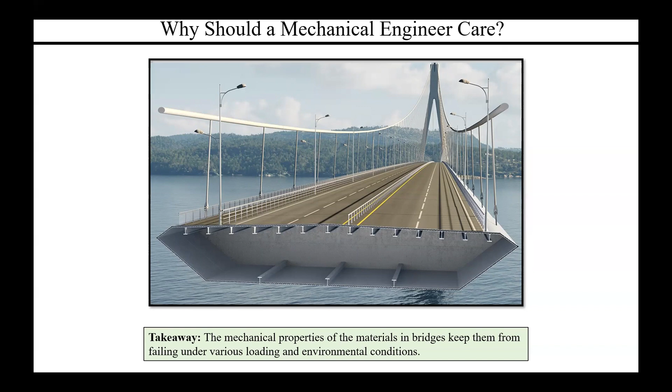So again, why should a mechanical engineer care? You're talking about extremely large application spaces where you'd be interested in something like the mechanical properties. For this lecture, we're really going to focus on mechanical deformation and how that affects the properties of the material, and discuss what deformation actually means in the context of the structure side of the material.

The main theme of this lecture is that we have two regions when you deform a material via some sort of mechanical force. The first is the elastic region, and the second is the plastic region. From this stress-strain relationship we're looking at here, the region to the left, this linear region, is your elastic region. And pretty much everything else, once it enters that nonlinear region, is the plastic zone.

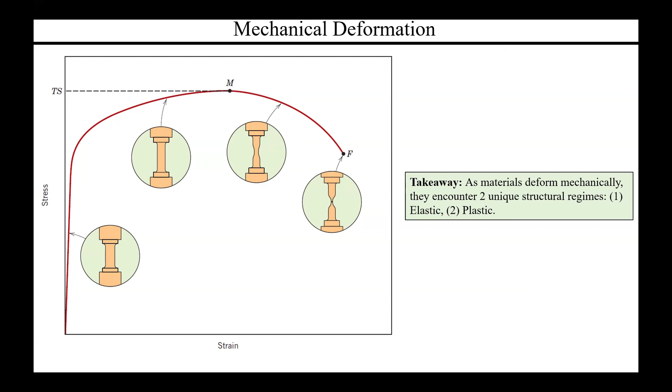As we move along this stress strain curve, we can even see these inserted images that show snapshots in time, and you can see there is a structural change that occurs. We will talk about those changes throughout this lecture. But again, to reinforce this idea: the linear region is your elastic region, and the nonlinear region is your plastic region.

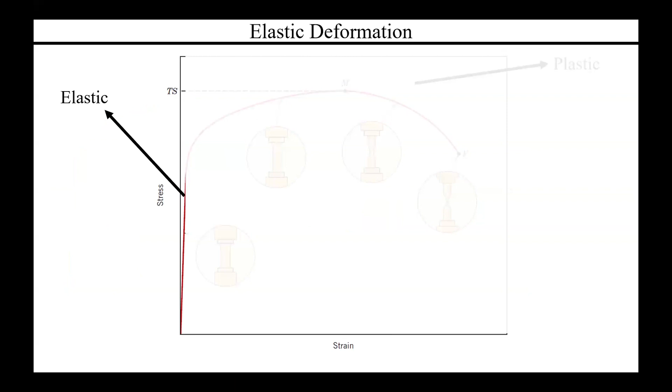So we're going to start the first half of this lecture focused on the elastic region.

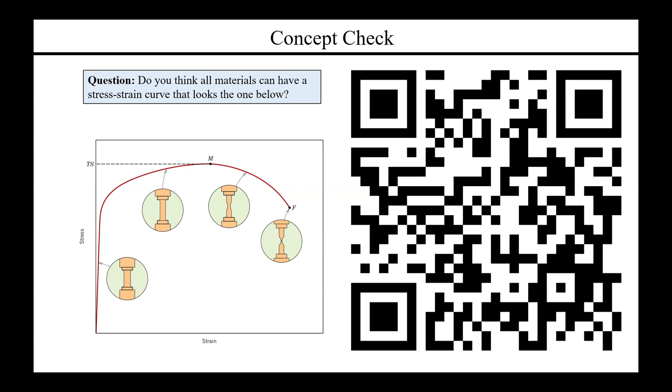So the question here is, do you think all materials can have a stress strain curve that looks like the one below? And what I mean by the one below specifically is that there is a unique elastic and plastic region. The answer is, it kind of depends. I know it's not a great answer, but as with most things in material science, it really does depend very heavily on the actual specific conditions that we're talking about.

So, for example, these stress strain curves are kind of snapshots based on the external conditions. What temperature was it at? How humid was it? Anything like that. What pressure was it under? And the stress strain behavior can ultimately change depending on what those conditions are, and we'll talk about those.

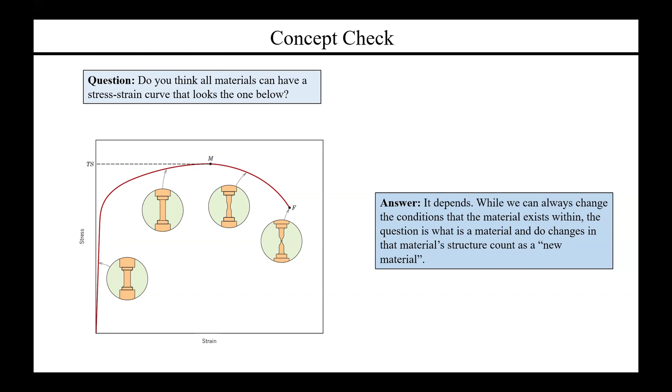Another aspect of this is, what really counts as a new material? If the material is corroded beyond belief, is it really the same material anymore, or is it maybe some oxidized version of what you started with? So, is it possible to create a stress strain scenario that looks like this for pretty much all materials? Pretty close. But again, you have to change the conditions that it exists within.

When we're talking about different types of mechanical loading, this is the type of force that you can apply onto the material. The two simplest are compressive and tensile. Compressive is applying a force and making it smaller somehow, and tensile is the opposite, making it larger. So physically, you're crushing something to make it smaller, or pulling it apart, and that's your tensile force.

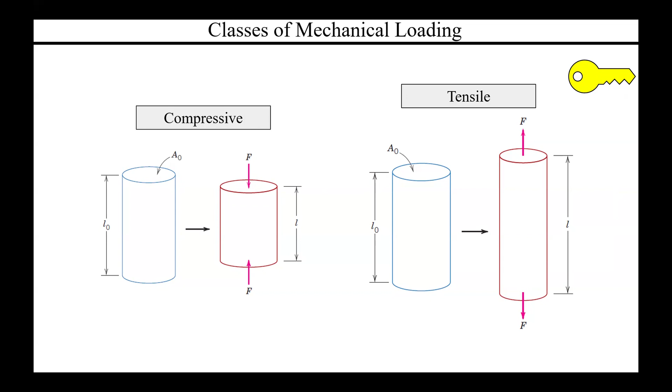Two more complex, but still relatively simple, types are shear and torsional. For shear, you apply a force onto the material, and instead of just pulling it along one direction, you're changing multiple directions at once. I equate this to taking a box and turning it into a diamond shape - the volume doesn't really change, but the shape does. Torsional is applying a rotational force onto the system, so you're getting a rotational structure change.

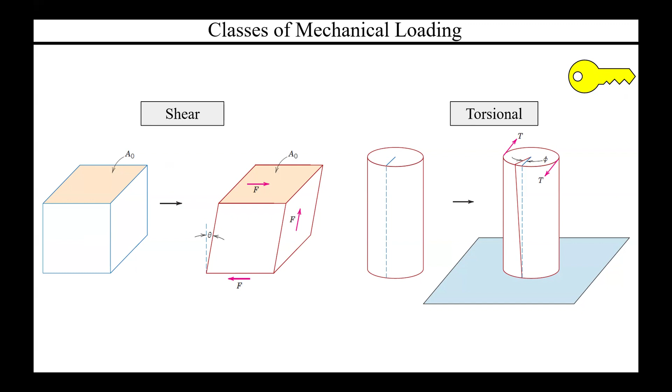In order to understand all this, we also have to understand what the concept of stress even is, in particular engineering stress. We'll talk about different types of stress throughout this lecture, but think of it this way: you're applying a force over some area. It's similar to the definition of pressure, but stress is a more universal force per area, whereas pressure is specific to certain instances.

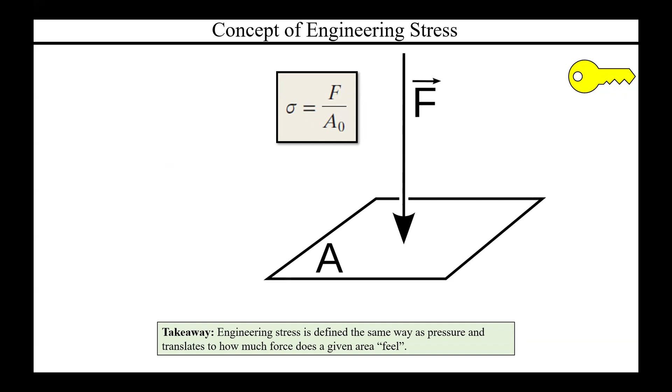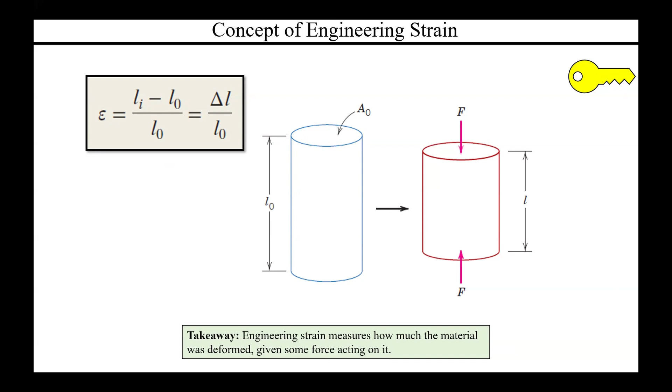That force will ultimately cause the material to change, and this is where strain comes from. Strain, at least in the context of tensile or compressive, is fairly straightforward - you apply a force, the material changes along one direction, so you measure the strain as the change along that direction, your current length versus the initial conditions. Because of that, you end up with negative and positive strain. In compressive, negative strain implies the material got smaller, and in tensile, positive implies it got bigger.

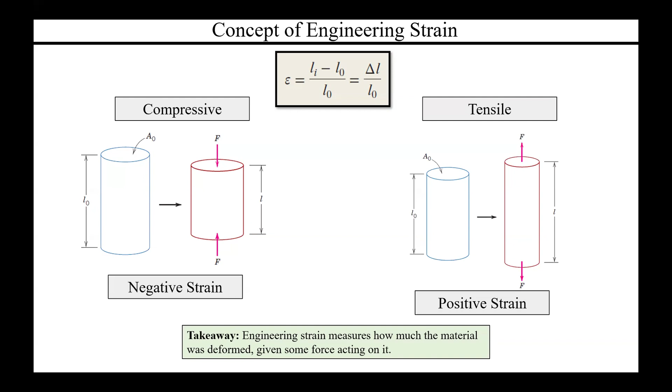That is purely due to convention. You could flip your L naught and Li and redefine this somehow, but the standard convention is that negative strain means it got smaller and positive strain means it got larger.

Now shear stress or shear strain is a little bit different, in part because the material is changing shape along two directions. So you don't have the same simplistic length-based change as in compressive and tensile. Here you define the strain as a function of the angle that the material underwent in that change of shape - the tangent of that angle is how you define the strain.

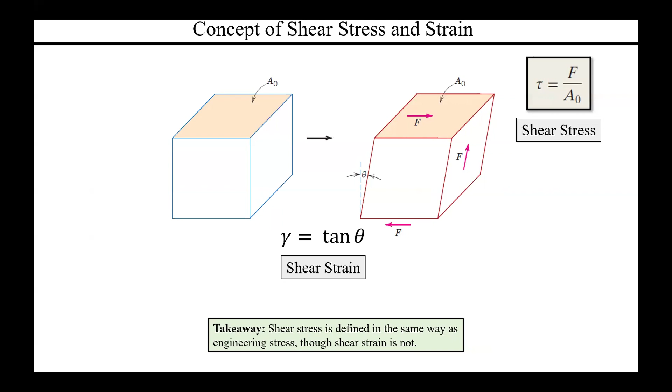The stress is going to be defined in pretty much the same way - it's still a force being applied over an area. It's just leading to a different physical change within the material.

The definitions you just saw are really defined for the case where the stress or force being applied is acting either parallel or perpendicular to the actual planar faces of the material, those outside faces. If you want to do this for an arbitrary geometry, the definitions are defined with regard to the angles that the stress is actually being applied at.

Now this is relevant, and why is it necessary? You may, for example, apply a force diagonally onto a material - it's not perpendicular to the material. So how that force actually gets distributed within the system may change. If you're applying it along one of those planar faces, all of that force is being distributed evenly into the material because it's perpendicular or parallel to it. But in the case of a force applied at some non-zero or not 90-degree angle onto that material, the force will get distributed throughout the material in different ways.

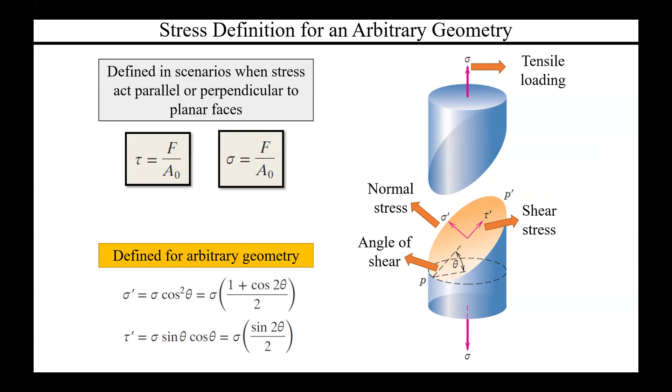Maybe it's partially distributed - maybe I applied a force and 80% of it went to the tensile force and 20% of it went to a shear force. And again, that depends entirely on the material, what its structure is, and the actual angle that you applied that force at.

One important aspect of these stresses and strains we're talking about is the ability to quantify that relationship, the stress strain relationship. This is done in a couple of ways, but it's almost always done through the idea of a modulus. In reality, the modulus is just a slope, but it's a slope under different scenarios.

The elastic modulus, you may also hear this as tensile modulus or Young's modulus. It's all the same thing. This is really the slope of your stress strain curve when you're doing tensile or compressive deformation.

Similarly, shear modulus measures deformation of shape, specifically at constant volume. We talked about this earlier. And then finally, bulk modulus measures volume deformation.

Again, that's the stress strain relationship under volume deformation, specifically isotropic volume deformation, meaning all of the material is changing its volume at the same rate. This is essentially the equivalent of a box getting bigger, but it remains a box, so all those axes relationships are the same.

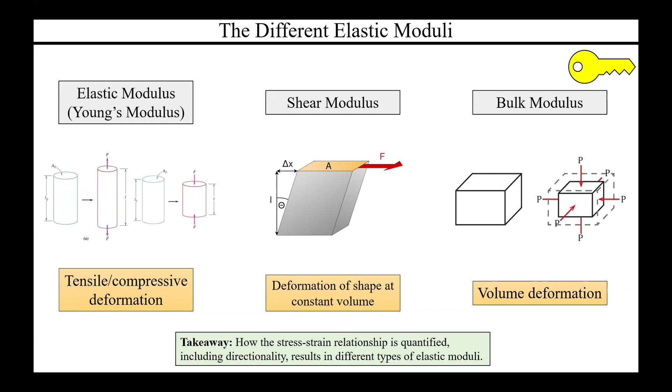If one side of the material is changing its volume deformation faster than the other, then in reality you don't have one bulk modulus for the entire material. You'd have to break the material into segments, each with its own bulk modulus. This is because the material changing in different ways depending on location means there are different structures within it, so you need a bulk modulus for each structure you're looking at.

Let's talk about this first for the scenario where we have tensile compressive deformation. This is what the relationship looks like. If you remember back to the beginning, we talked about how the elastic region was that linear region, so our relationship is really just y equals mx plus b, which is what you see here. Your y is your stress, your m is your modulus, and your x is your strain.

There is no b because the y-intercept is 0, so it's 0 stress at 0 strain. But that's really what this is—it comes from just a simple y equals mx plus b.

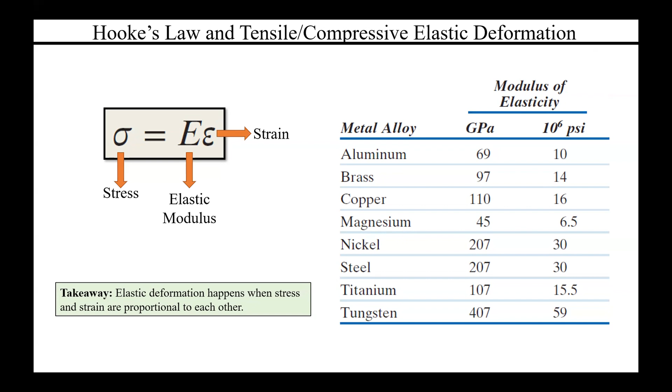But if you look at something like brass versus tungsten, you'll quickly find that tungsten has a nearly 4 times larger modulus of elasticity. What this means, in principle, is that you need to supply 4 times the amount of force on tungsten compared to brass in order to induce the same strain.

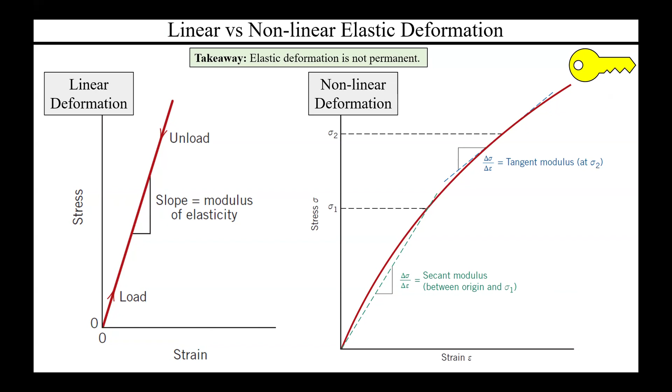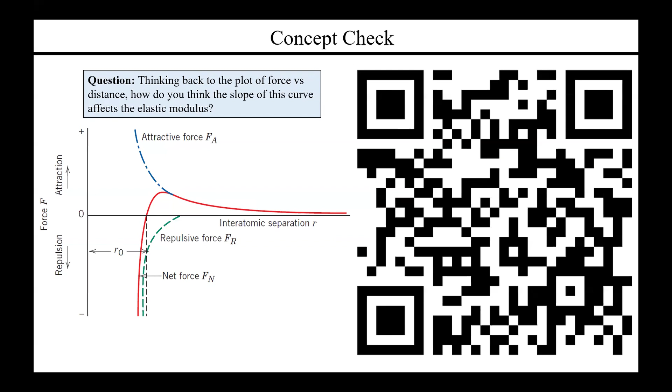So another question: thinking back to the plot of force versus distance, how do you think the slope of this curve affects the elastic modulus? Feel free to answer the QR code if you're interested. But the answer is that a larger slope equals a larger change in force equals a stiffer material.

That's really the portion on the left of this red line where you cross that 0 point and then dive down into the negative region. Essentially, if you're pushing atoms closer and closer, a larger slope means more energy is needed to push those atoms closer together, which means you need to apply a larger force to facilitate that. That ultimately leads you to a stiffer material.

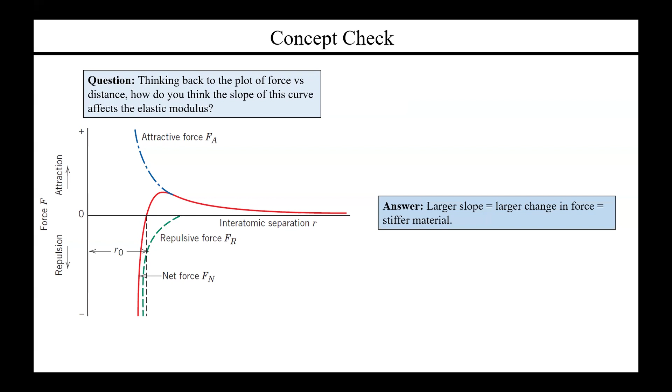Interestingly, if you look at this, it's a similar plot to what we showed back in our bonding lecture, but the elastic modulus is essentially proportional to the slope of the force, prior to that equilibrium bond length. You don't want to go past the zero point, because the atoms are just getting further and further apart, so they're not really interacting anymore.

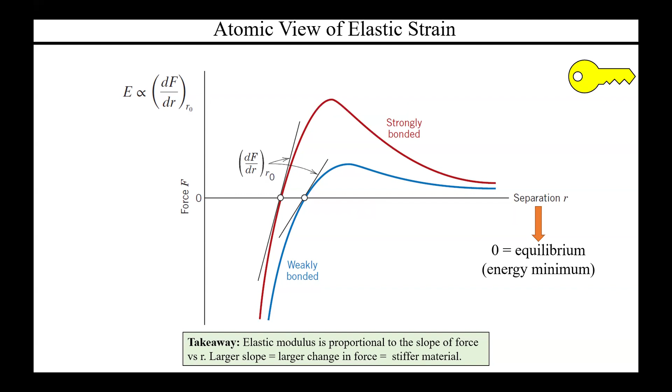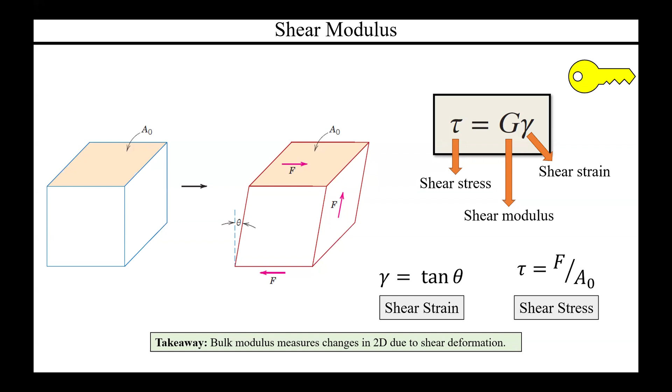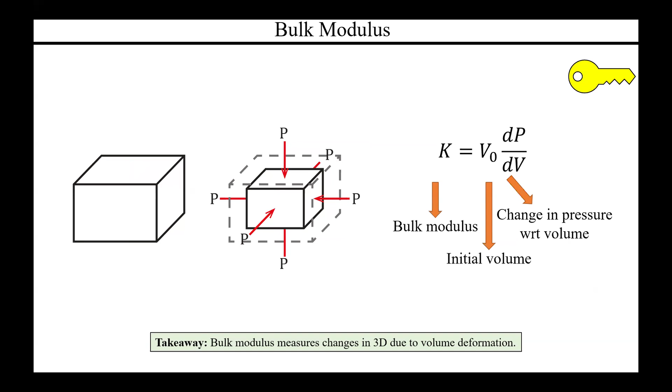Bulk modulus is slightly different. Here it's more about the product between the initial volume and the change in pressure with respect to volume. That gives you a sense, kind of that ratio between the two. You can also arrive at bulk modulus by measuring energy as a function of volume, and essentially the bulk modulus would be the slope at that energy minimum. So that's another way to access bulk modulus.

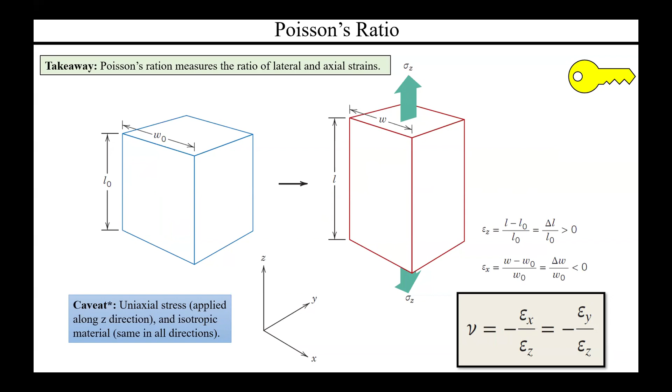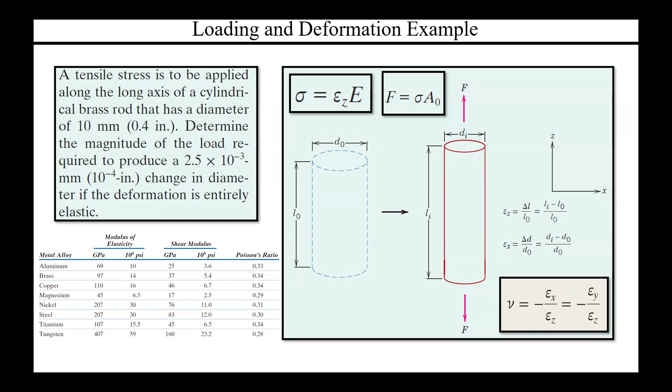The first step is to recognize that ultimately what you want is the strain in Z, since this is a tensile force being applied onto the material along that direction, and you don't have that. What you do have is a change in X, which is your cross-section diameter difference. So you can solve for that and then use Poisson's ratio, since you know it for brass, to solve for the strain in the Z direction.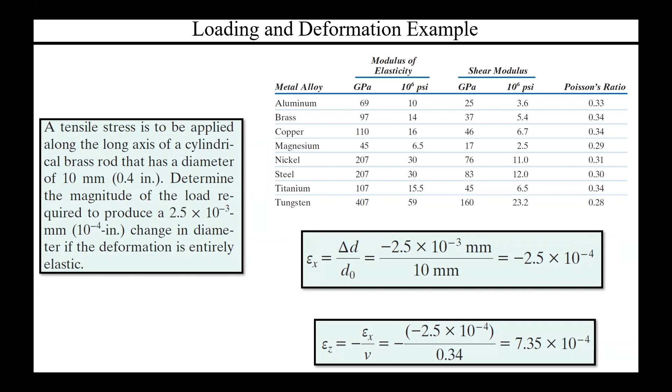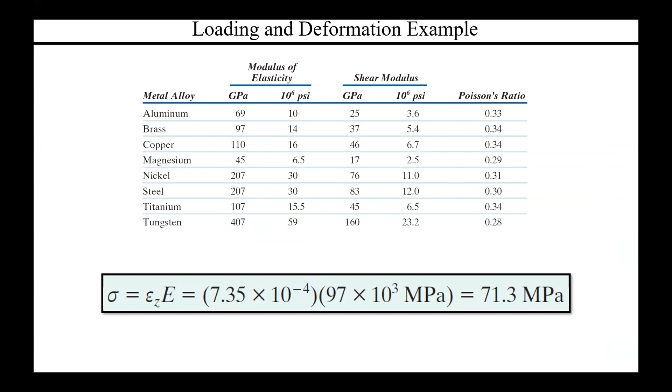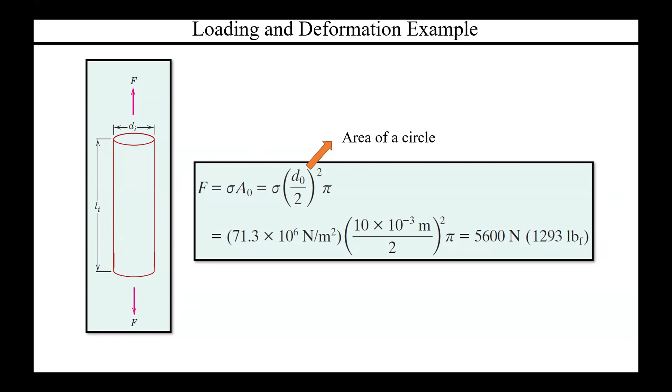You can then solve for the stress within that Z direction, along the tensile direction, by using the elastic modulus coupled to the strain in Z, giving you your stress. But ultimately what we wanted was the magnitude of the load, not the stress itself, so that would be force. You need to understand that this is a circular area, and because that force is being applied perpendicular to that plane, that's where the force actually comes from. So your area in this case is the area of a circle, and you plug your values in to get your final solution.

Another important aspect of this is that elastic properties, mechanical properties in general, are not constant. They depend on many things. Temperature is an easy one to visualize - you heat it up and obviously it's changing its structure.

So in this case, tungsten drops a little bit from negative 200 to 800 C. Aluminum sees an even larger drop. Part of the reason for that is that 800 C is not really close to the melting temperature of tungsten, whereas with aluminum, it's beyond it. So you may see a larger drop off at lower temperatures for materials as you're approaching the actual melting temperature, whereas for materials not even halfway to the melting temperature, you won't see as much degradation. This is important because it means you'll see larger degradation the closer you get to something like melting temperature.

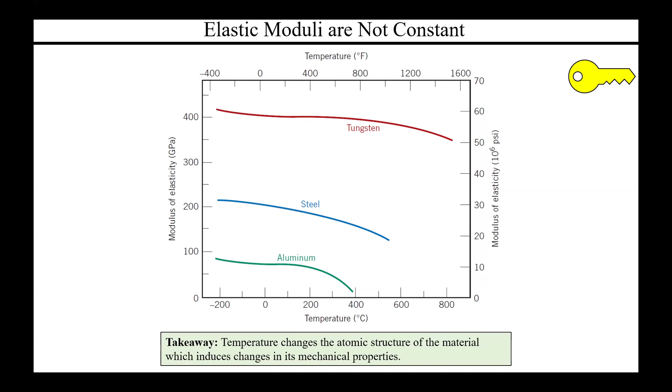Another important aspect we haven't talked about yet is time dependence. Everything we've discussed up to this point is this ideal elastic scenario: you apply a stress, there's a static change in strain that isn't really changing, and when you remove the stress, the strain goes back to zero if it's purely elastic. The reality is this is not necessarily true - there's usually an actual time dependence aspect.

This would be your linear viscoelastic and anelastic behavior. We'll talk about other types of time-dependent behavior, particularly when we get to things like polymers. But if you look at the anelastic case, this is a small effect.

Think of the y-axis as the initial stress applied onto the material. That stress is constant, but the strain changes as a function of time. In the anelastic case, you apply that stress and get a small change in strain over time, but eventually it plateaus. When you remove the stress, it takes a little time to restore the strain that was induced - it's not an immediate jump back down to no strain.

The viscoelastic case shows a much larger and even constant change in strain when stress is applied, and it never really plateaus. When you remove that stress, it's similar to the anelastic case - it takes time before it eventually plateaus off. But the important part is that in the viscoelastic case, you didn't recover everything. You can think of this as a form of plastic deformation, but we'll talk more specifically about what viscoelastic means structurally in polymers.

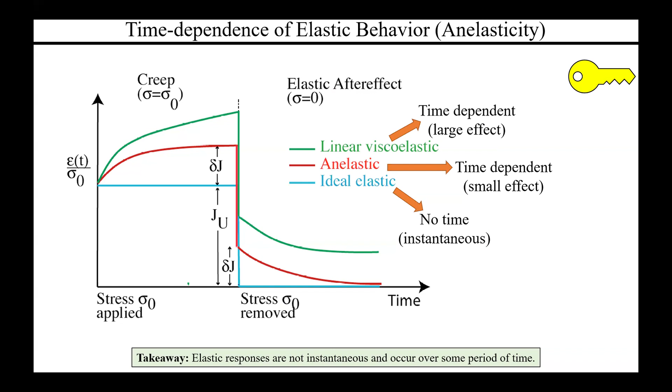Now let's move into the plastic region, which can be broken up into a few different zones. The first is when you've left your elastic region and are pushing toward the M point, or tensile strength - we'll talk about that later. That is where you see uniform deformation within the material.

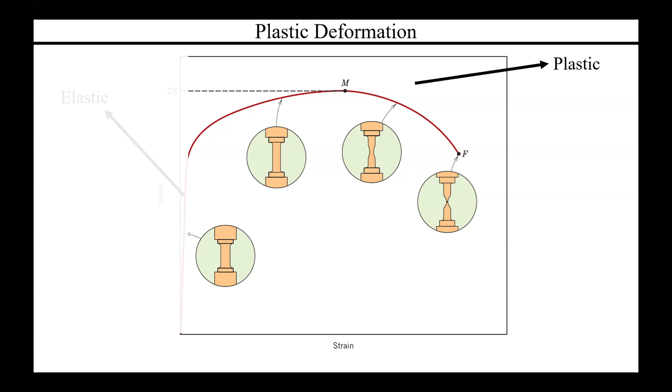Past that point, you're getting localized deformation, which is why you see this hourglass shape start forming in the pictures. That means the stress is concentrating within specific points. What you're seeing is a phenomenon called necking, where the stress is highly localized to a specific region, and that is where the material will ultimately fail - the point F, or fracture point.

At the beginning of the plastic region, the material is actually getting stronger. Once you've reached the maximum stress you can handle, the strength decreases, in part due to this localized deformation making the material weaker.

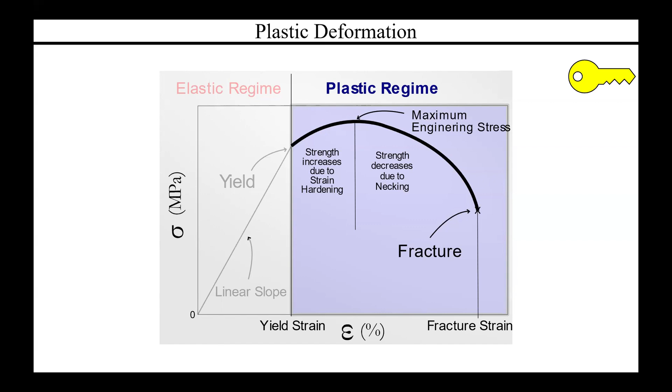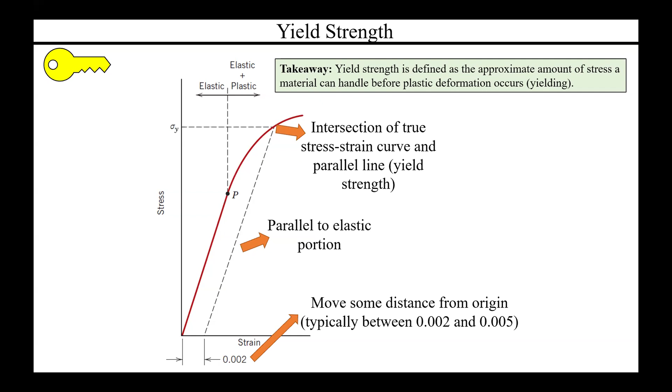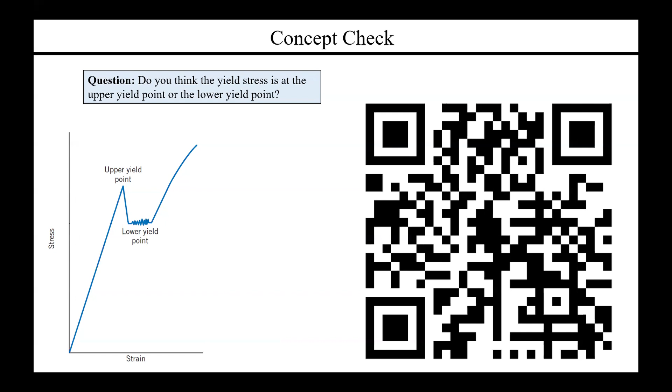An interesting concept check: what happens when you're increasing in the linear region, hit an upper yield point, then a quick drop-off to a lower yield point, with some oscillatory behavior before picking up again and entering a nonlinear region? Given that complicated yielding behavior, what do you think the yield stress actually is - the upper yield point or the lower yield point? The answer is surprisingly the lower yield point.

The reason is, if you think back to what yield strength is, it's the point at which there is no longer elastic behavior - it's the transition between elastic and plastic.

And there is no requirement that that transition point happen at the maximum stress that can be met prior to plastic. This is an interesting caveat in that you can have scenarios where you can sustain a fairly large stress, but then something happens in the structure of the material and you see a drastic drop off in the stress that can be handled. It's only after that drop off that you actually see permanent damage to the material. We'll talk more about this when we get into failure and strengthening of materials, but it's an interesting phenomenon here.

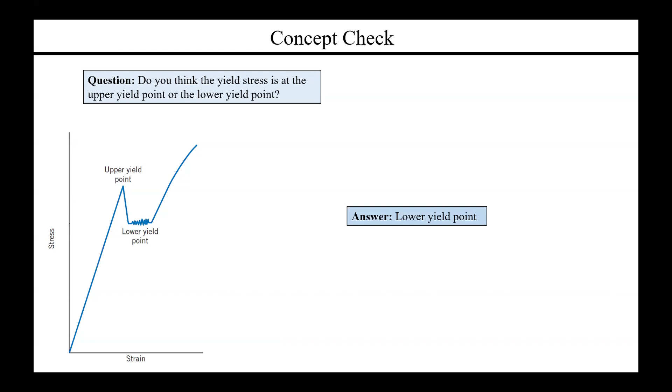It's important to remember that what yield stress is actually measuring is that transition period between the elastic and plastic region specifically. So this is kind of a recap of what I just said. A key piece of information is that parallel offset line we talked about to estimate the yield strength. You can't really use it here because there's not a continuous stress strain behavior. There's a discontinuous behavior at that upper yield, lower yield transition region.

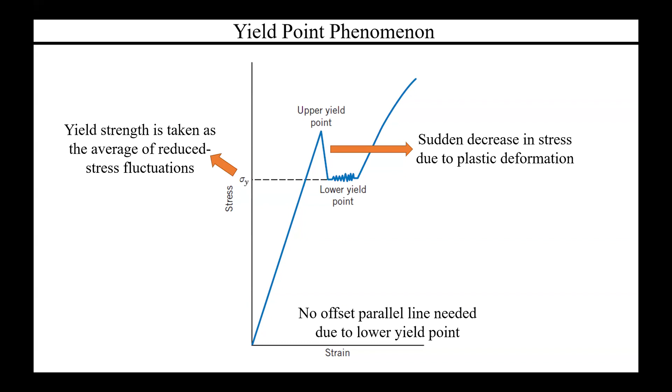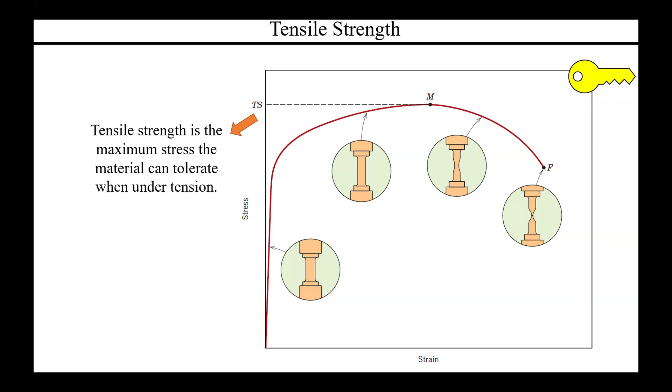So the tensile strength represents our transition between uniform deformation and concentrated or localized deformation. Prior to the tensile strength, you're getting uniform, homogeneous stress applied throughout the material, which is making it stronger. We'll talk later on in strengthening about what the actual mechanisms behind that are. But once you reach that M point and transition beyond it, you're getting localized stresses. So the stresses are building up in certain spots, getting this necking behavior, at least in a ductile material, until eventually you hit that fracture point.

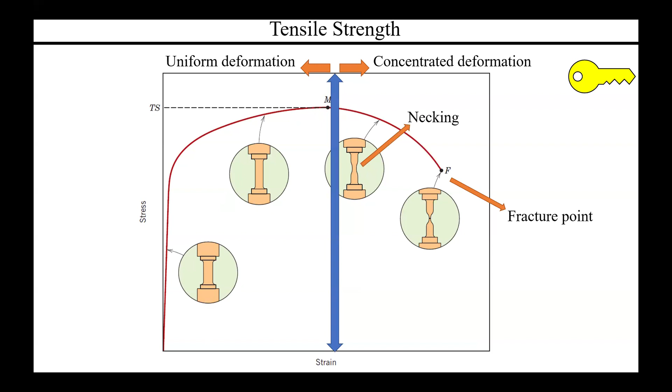So we're going to do another example here. There are two questions that you need to solve. The first is the modulus of elasticity, so given all this information, figure out what the tensile modulus is. The second is the maximum load that this cylindrical rod can sustain if you have an initial diameter of 12.8. There's a couple of little subsets here. Note that the 150 MPa, 0.0016 point is pointing to a point within the linear region of the subplot, and the subplot is just a zoomed in region of the very beginning of the much larger plot. Again, that A point there, A 345, 0.06, is literally pointing to the A on the plot.

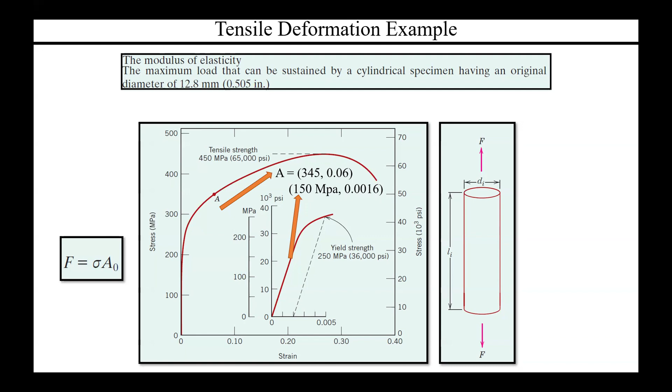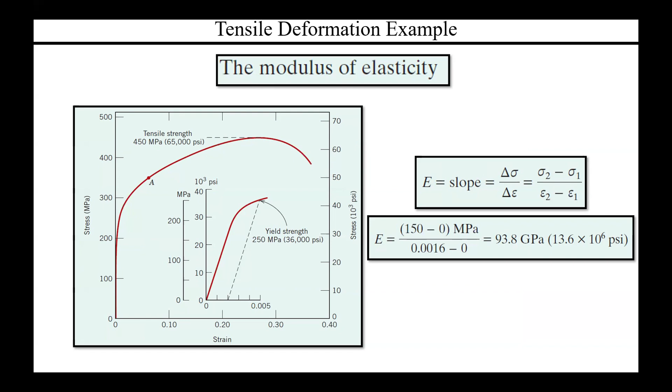So modulus of elasticity: we know that that's the slope within the linear region. So you can literally just pick that point that I had added onto the diagram, that 150 and then 0.0016. And again, the second point can always be the origin because it's the slope, it's a linear region. So you can pick the origin always and then use those 2 points to get your elastic modulus.

So once you have that, another important aspect of this is we want the force, so that's the second question here. The original diameter is 12.8 millimeters. So again, the key here is understanding that what we're really looking for is this idea of a maximum load. So that's your tensile strength. That is why the stress that you can actually plug in here is that 450 times 10 to the 6 newtons per meter squared, which is your 450 megapascals.

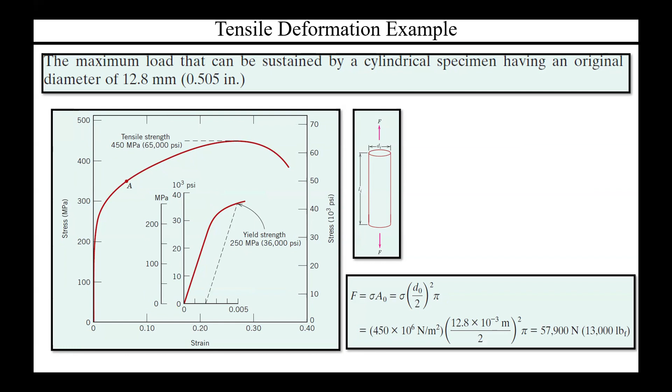So it's important that you be able to read the various regions of the stress strain curve, then understand what the terminology is. Maximum load is tensile strength, load is force. It's very easy to get these things confused, but these practice problems, and especially the practice problems and homework, are going to help you be able to differentiate these things.

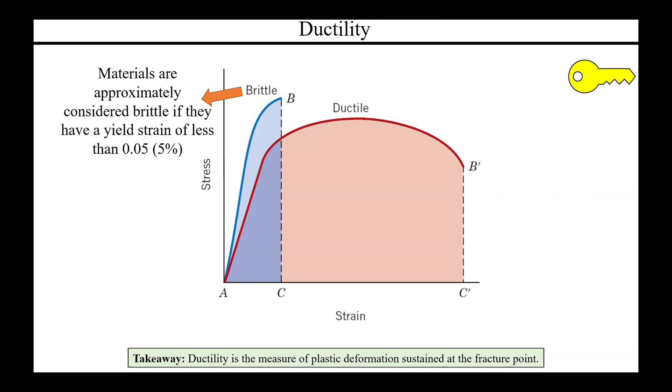So another important aspect is ductility. This is essentially measuring the strain, so this is a strain-based property. Ductility is measuring the amount of plastic deformation sustained at the fracture point. There are two ways to do this. The first is strain-based: that's literally the length final minus length initial, divided by length initial, times 100. That's measuring the strain of the initial and the final.

And the second is cross-section based. This is particularly useful if you have something like that cylindrical rod and its cross-section is actually changing, so you can measure a reduction in area, essentially. Important to note, though, that brittle materials are materials whose ductility is small, so they really didn't sustain any plastic deformation prior to that failure point, whereas ductile materials can sustain a significant amount. It is important to understand as well that brittle and ductile have nothing to do with tensile strength. It is purely a strain-based property.

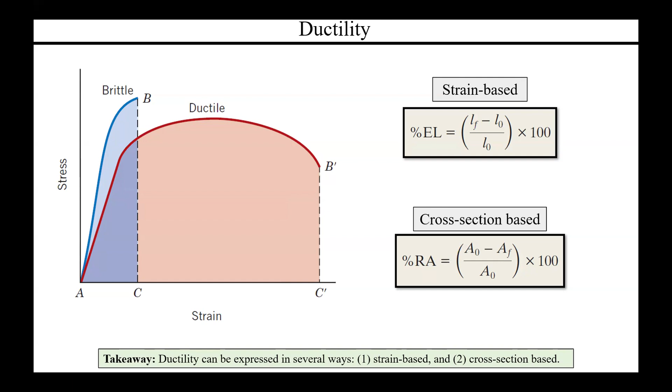Physically, think of it as how much energy or force the material is actually going to absorb during that elastic deformation. So a material that is resilient is one that can absorb a very large amount of energy prior to entering the plastic region, which is good in certain applications. If you want the material to not have plastic deformation, you would want a resilient material.

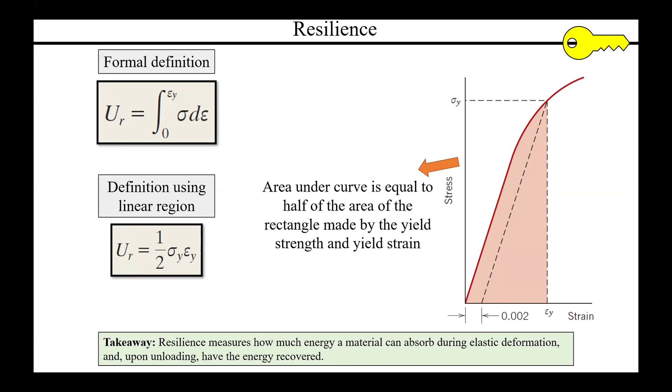However, there are materials that you want to fail pretty quickly. Think of a material that you want to break in order to stop something. An easy example of this is from electronics, think of a fuse. There are many instances where you don't want a large amount of energy transferred onto something else and cause damage to that other component of your system. So you have a material that is there to absorb that and fail so the energy is not transferred to something else. That would be a material that would not be resilient, but still has a very useful application.

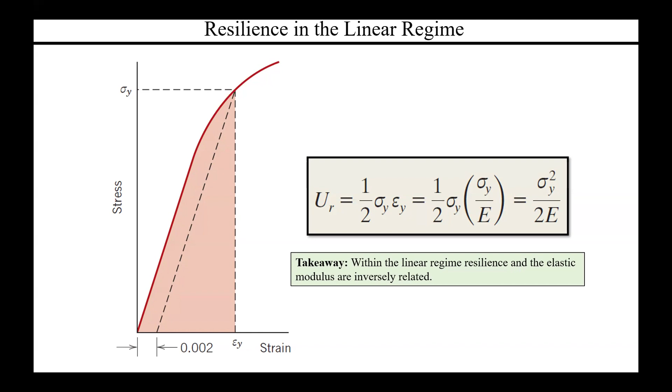Since we're in the linear region, we have a nice heuristic relationship between the elastic modulus and the resilience. This is particularly useful if you are trying to find the resilience, the yield strength, and the elastic modulus. It gives you an easy way to estimate what the resilience would be without having to run an actual resilience test or have a continuous stress strain relationship. You may only need 2 or maybe 3 points - your yield strength, your origin, and a point along the elastic region to get your elastic modulus.

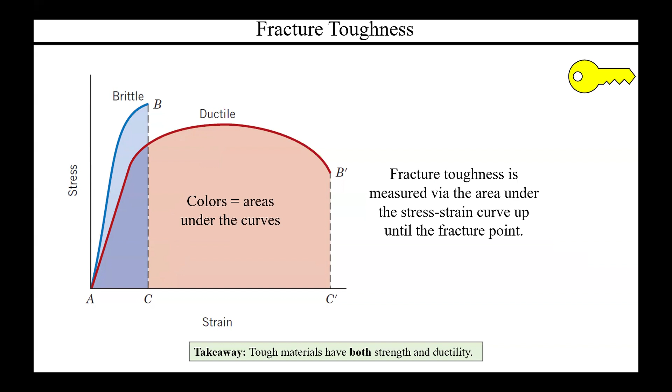Fracture toughness is now the area under the curve up until the fracture point. This is where the idea of a tough material comes from. It's something that has both strength and ductility. Materials that are very strong but very brittle are not going to be tough, whereas materials that are extremely ductile but not very strong are also not going to be tough. So your tough materials fall somewhere in the middle - they have fairly high tensile strength, but are also fairly ductile.

There are structural changes happening inside the material that are ultimately leading to that. An important aspect of this is that all of this is happening not just because temperature is some mystical force, but because the temperature is changing the structure of the material somehow.

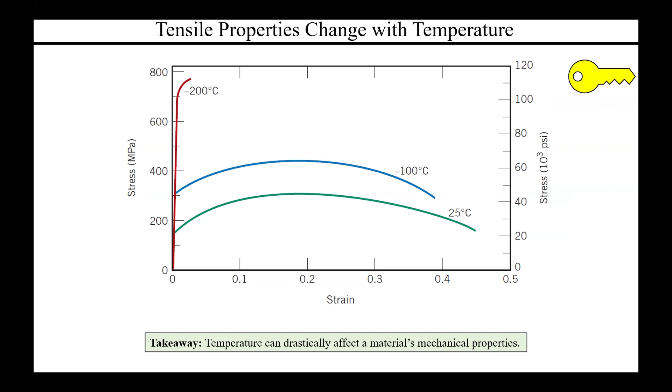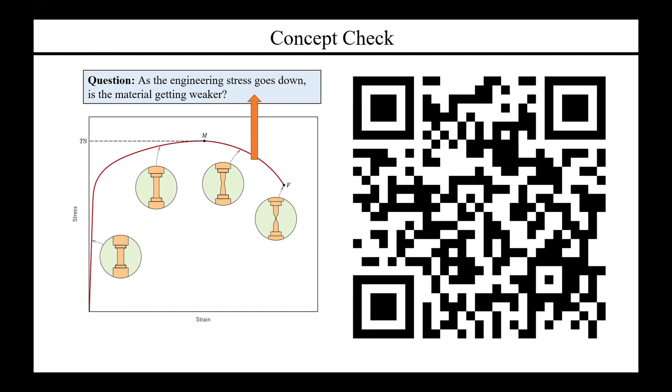It's actually getting stronger. This is a counterintuitive thing to discuss, but if we think back to our definition of engineering stress, it's force by area, but specifically the initial area. This may apply rather well in the scenario where we're in the elastic region and even somewhat into that initial plastic zone.

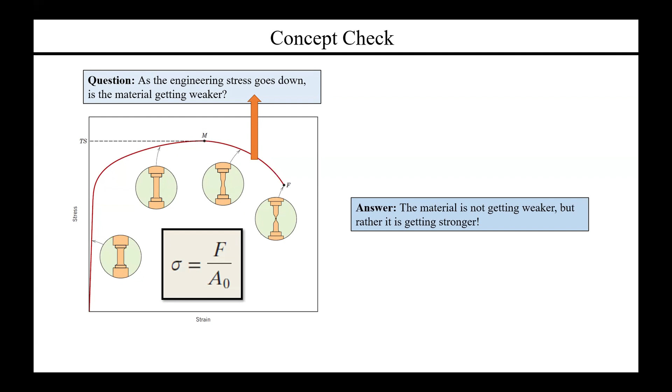As that cross section area is changing, it changes significantly after the tensile strength point. In fact, it's not even potentially the same shape anymore. Once you have this necking region, you have this very complex topology happening within that failure zone, so the area is nothing compared to what it was in the beginning.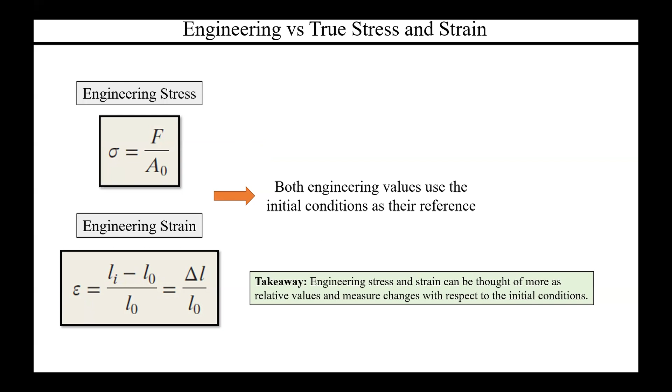So that brings us to this idea of engineering versus true stress and strain. In engineering, both of these are a reference to the initial conditions, so you can think of engineering stress and strain as relative values with respect to the initial conditions. Whereas true stress and true strain are more like absolute terms.

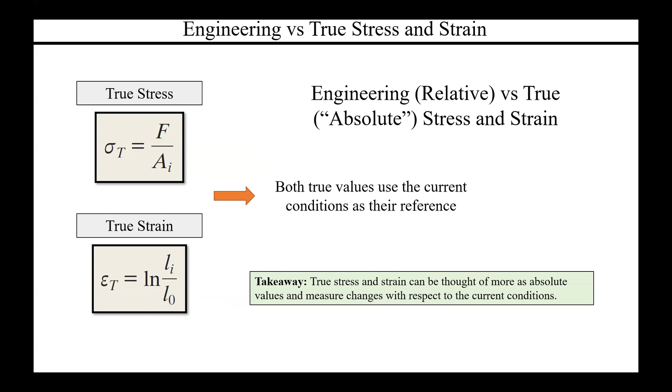In the case of true stress, it's still the same definition: stress is force per area, but specifically the area is now the area at snapshot i, a point in time, rather than the initial area or plane where the force is actually being applied. True strain is still with respect to the reference, a relative value of current with respect to reference, but now it's a log-based relationship rather than just a basic linear relationship.

So that leads us to this: we have three curves here, engineering, which is what we've already talked about, true, which is the new value, and corrected. What you'll see is that all three of these are effectively the same within the elastic region, because the cross-section area is not really changing with respect to initial conditions. Even once you enter the plastic, non-linear region, there's still a significant period where that area isn't changing much, so the engineering and true values are very similar.

But once you start seeing a significant change in that cross-sectional area, that's where you start seeing deviation between the engineering value and the true value. That M prime is what you would ultimately call your ultimate tensile strength, as opposed to just tensile strength.

In principle, the true value gives a much better estimate of what's actually happening. However, it's actually overestimating the amount of stress, because the area is more or less considering a simplified version of the actual topology. So it's like what happens if you start off with a square area within your cross section, but by the end you have some weird jagged topology that is very complex. The area isn't necessarily easily quantifiable anymore, but you're still using a simplified metric to gauge it.

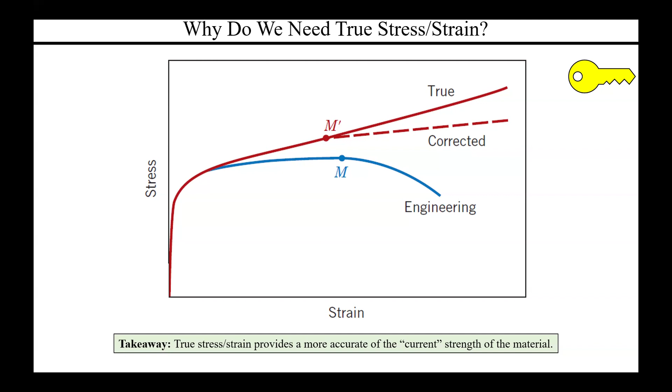So let's do an example. This is a problem where you have a cylindrical rod with an original diameter, and it is tensile tested to fracture, meaning we did a tensile test and it ultimately failed—the material failed, not the test. We know it has an engineering fracture strength of 460 megapascals, and we know its cross-sectional diameter at fracture. There are two things you need to do: first, figure out the ductility in terms of percent reduction in area, and second, find the true stress at fracture.

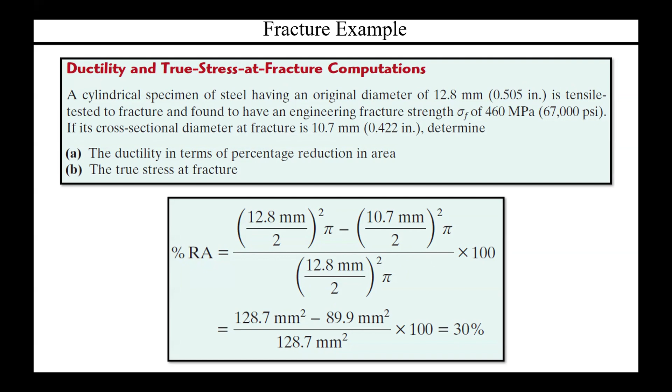So you have a couple of functions, take a minute to do these on your own. To solve for the ductility, we already have the values, and the only real thing we need to understand is that it's a cylindrical rod, so we need the area of a circle. The rest is simply plug and play, and we find there's a 30% reduction in the cross section. The second piece is the true stress at fracture.

And what we have is the engineering fracture strength. The problem is that the engineering fracture strength requires an engineering stress relationship, so you need to use your initial area in order to get that force. Now, the force will be the same force, but the actual measured value will be slightly different.

So again, we have our initial area, we have our engineering fracture strength, we use that to solve for the actual force that will be encountered. And then we plug that into this second piece, same equation, but this is the true stress equation. We use our final area in order to solve for it, and we use that to get our true stress at the force that is applied during that fracture point.

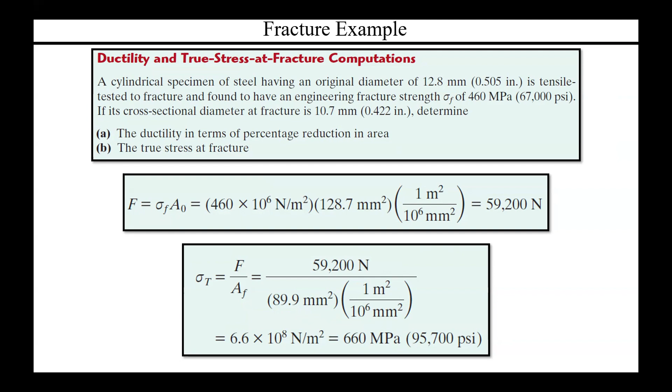Interestingly, you will notice that the true stress gives you 660 megapascals at fracture, whereas the engineering fracture strength was 460 megapascals. So a nearly 200 megapascal underestimation by the engineering fracture strength.

All right, let's talk about elastic recovery. So we know that if you're in the elastic region entirely, you'll recover all of the strain that was applied to the material. However, once you go into the plastic region, you can still recover things, it's just you won't recover all of it. So this is an example.

You have that initial yield strength. You kind of go past that initial yield strength, that point D, and then you remove the load on the material. The material will still have some form of elastic recovery, but again, it doesn't recover all of the strain that was applied. It is still somewhat plastically deformed because you entered into that plastic region.

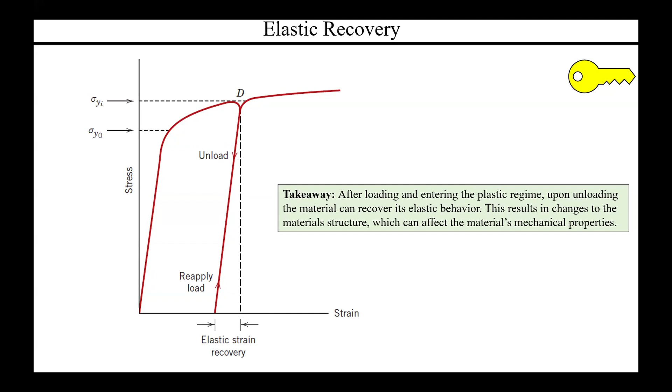Interestingly, if you reapply the force onto the material, you now have a new yield strength, that sigma y-i. So essentially, you have to go back up to the stress that you encountered at that point D to further deform the material. We'll talk more about this when we go over strengthening of materials. But essentially what you're doing is you're permanently deforming the material once you go past the initial yield strength. So you've created a structural change in the material that you now have to overcome in order to further strain the material. So each time you go through this elastic recovery process, once you've entered into that plastic region, you will have a new yield strength.

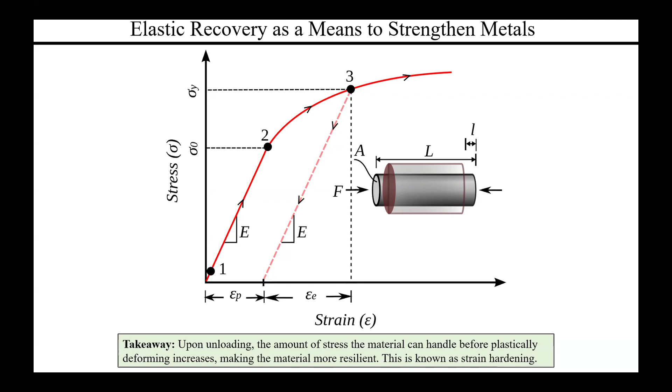Again, we'll talk about this in great detail when we go over strengthening of materials. But this idea of elastic recovery, you can use this to strengthen materials. This is what is known as strain hardening. So you can essentially apply force onto a material, strain it, but do it in a very controlled way, and you can actually make your material stronger. So just because you are permanently damaging or permanently changing the structure of the material does not necessarily mean that it is a degrading property. It can actually be a benefit to the material.

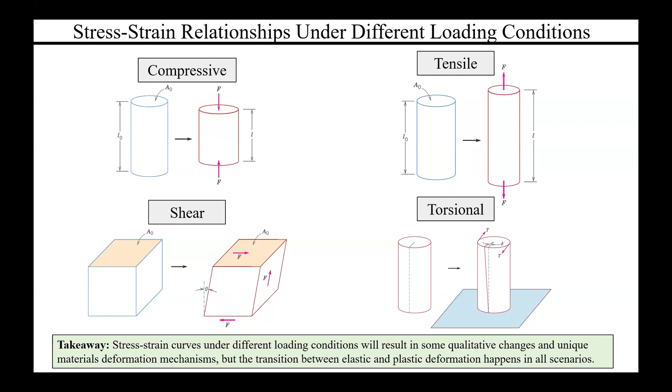So hardness is another property that's of particular interest. Hardness is a little bit more difficult to understand, and I think because people want to, at least in the past, students in this course specifically, have wanted to apply hardness to the total material. We'll talk about this more again during strengthening and failure, but hardness is a measure of localized, it's a local property. So I could have a rod of a material, and it could have 10 different hardnesses depending on where I look in the material.

And you can think of it as, if I pick a specific spot in my material, what is its resistance to plastic deformation? In some sense, what is its local resilience? So rather than having a resilience for the entire material, you can instead have a resilience for specific regions of the same material. And there are many different ways that you can quantify this, each one having their own kind of application.

It depends on how the plastic deformation is actually being applied. That ultimately matters, right? Are you applying the plastic deformation at a very specific point, like a steel needle drilling into your material, or are you taking a large ball and pushing it into the material? That actual mechanism of plastic deformation will be different, so that's why you have different tests for hardness. They're measuring different physical situations.

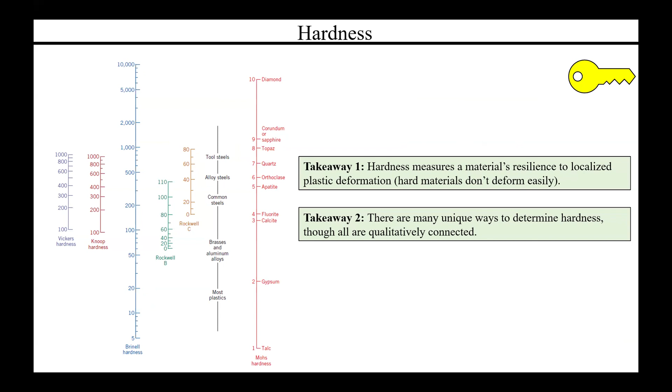So if you have multiple materials, say you take cast iron and make many different samples, or test various spots within your sample, what you'll find is that as the hardness goes up - and again, hardness is that test for localized plastic deformation - a sample with an overall larger hardness is going to have a larger tensile strength. This makes sense, right? If the plastic deformation occurs at a smaller hardness, meaning less energy was required to plastically deform it, that would mean the material likely has a smaller tensile strength because it's just an overall weaker material.

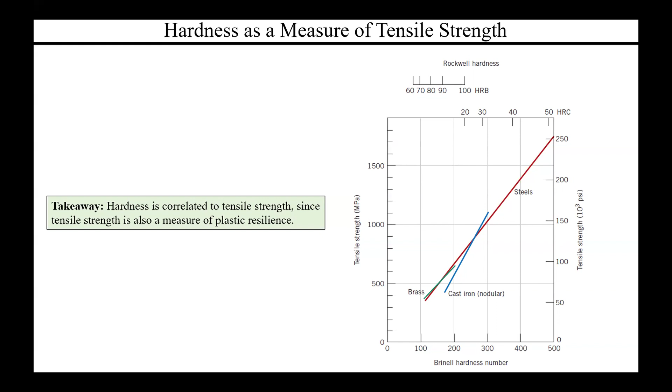So another concept check, this one is interesting: can a material be ductile and hard? Feel free to answer this if you're interested. And the answer is, why not, right?

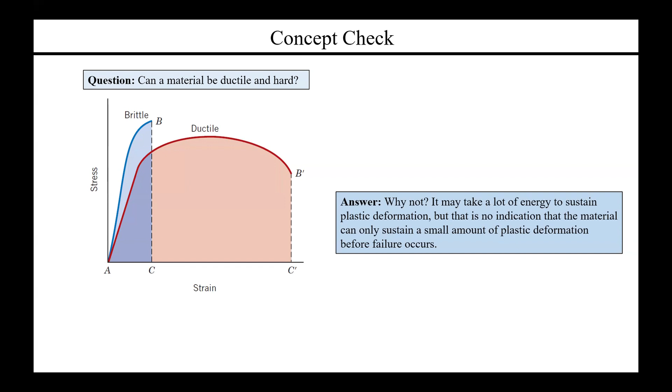Another aspect of this, when we come to the engineering side, is we want safe materials, right? When talking about mechanics, a lot of times you're talking about applications with direct interface with the general public - transportation, packaging, residential building, housing, anything like that. A lot of it depends on mechanical properties, so you need to design safe materials.

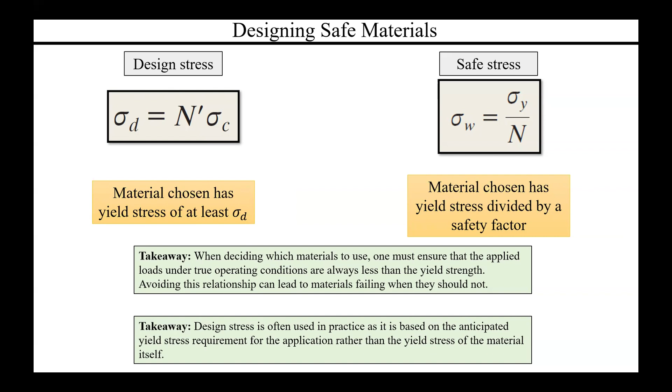In principle, they effectively do similar things, but there are different reasons you'd use one versus the other. Design stress is often used in practice because it's based on the anticipated yield stress you'd need for the application, rather than specifically the yield stress of the material itself. So if you already have the material in mind, maybe safe stress is a better way of doing it. But if you have more of a sense of what you actually need in terms of yield stress, then sigma D of the design stress gives you a starting point to go see what materials have at least sigma D.